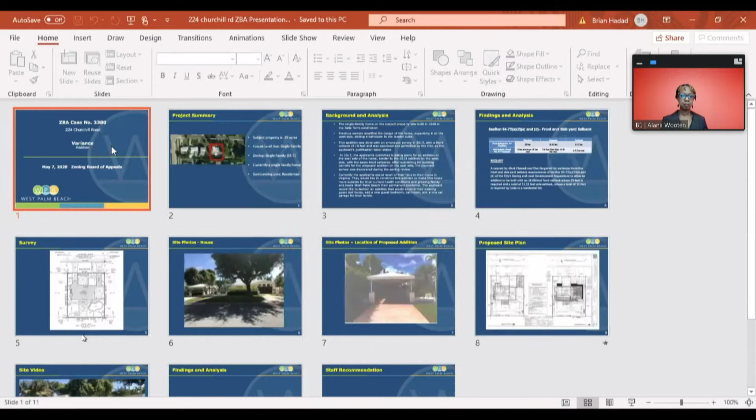This is Malaika, chairperson. Does the applicant go first before the staff? That's correct, correct. Alana, would you mind if the applicant goes first? Sure, yes, I'm sorry, I'll stop the share. Yes.

Sir, you'll need to unmute yourself before. Or here, let's see if I can do it. Okay, can you, there we go. I see it now, thank you. Okay, now we got you. I'd just like to understand what the expectations are in terms of presenting. They would like to get an overview of what we are asking for in short. I'm asking a question, please sir. She said please, go ahead. Please sir. Okay. Go ahead.

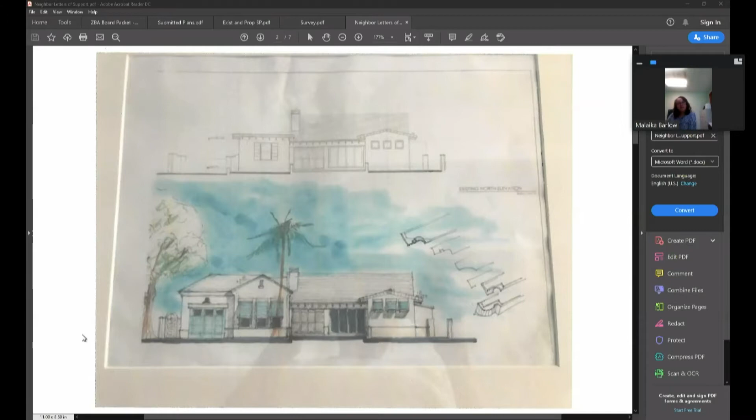So with that said, we don't intend to make any, forgive the expression, ugly changes that would either hurt our own home or make it unpleasant for our neighbors and our community. We pride ourselves on being very conforming to all the rules and regulations because we're part of a society. So that is the change. No other changes are going to happen to the house in terms of landscaping, zero change. There may be a couple of plants to be changed on the front once the garage has been put there. And of course, we will do whatever we need to do to beautify the front of the house, including the facade. The color will remain the same, clean white with gray bluish window treatment.

Alana, do you want me to go on and cover the background of the previous owner, or is this sufficient now? No, we appreciate the offer. Not necessary. Okay.

All in all, really, what we are asking your kindness for is allowing us to have the space so we can have our family join us and we can leave Washington, D.C.

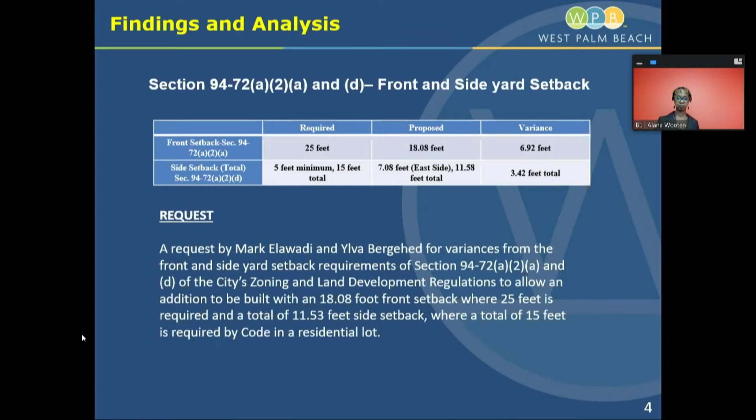So this is a survey of the property showing accurately all of the setbacks, and I believe this was in your package as well.

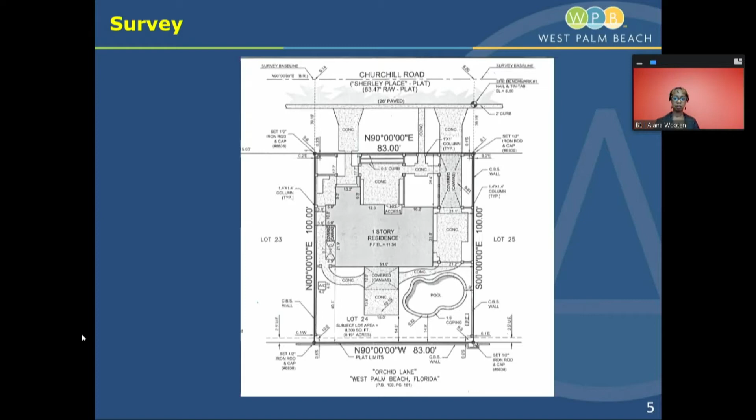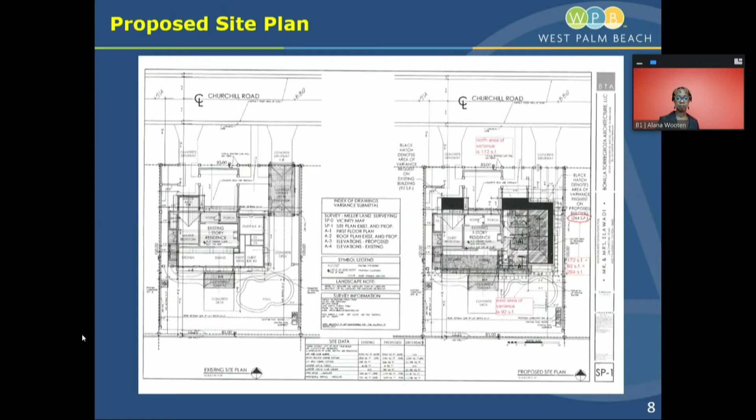As the applicant stated, the design of the addition will blend in with the overall design of the home. The residential development area here has a recessed property line that extends at least 24 feet back from the road, so if you're driving along Churchill Road, it's unnoticeable that the buildings encroach into the front yard setback. Further, on the east side, the applicants could have gone as close as 5 feet to the east property line by code, and they're only asking for 7, so there's no additional impact on the neighbors on the east side.

It's staff's professional opinion that the requested variance does satisfy all of the variance standards found within section 9438D6 of the city zoning and land development regulations.

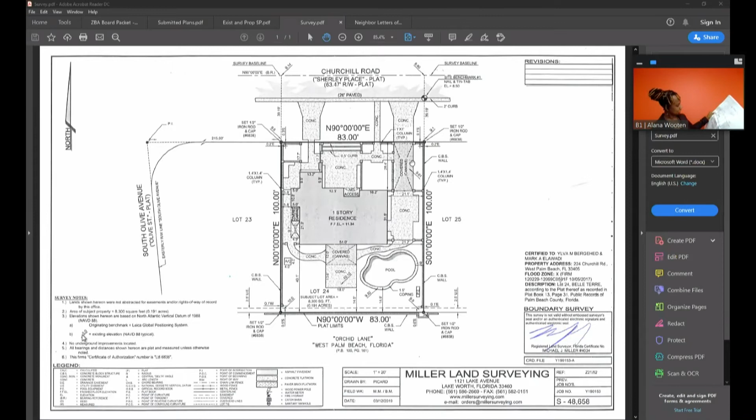Ms. Wooten, I think the question is it's not really shown, that covered canvas area. It looks like the front columns for that are right on the property line. If I was reading that correctly, and I had a hard time reading that off the survey, but that's what it looked like to me. Yeah, it looks like they have foot walls, like a small wall or fence.

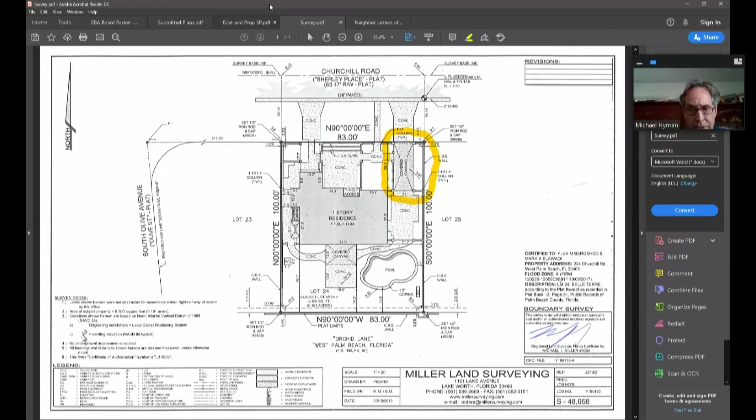Okay, well, I guess it's deceptive because I thought the property line is located where it is, and the carport, for all intents and purposes on the front of the property, is set on the property line. It's my understanding that's going to be removed. Yes, and the building will not encroach as much on the front setback. You're telling me it's going to be 18 feet from that line going to the south, is that correct? Yes, it's going to match the addition on the west side. Okay.

Yeah, John, that helps to do that—and I don't have my book downloaded. Thank you very much. So in black is the area that's going to be added. Yes, I see that. Okay, all right.

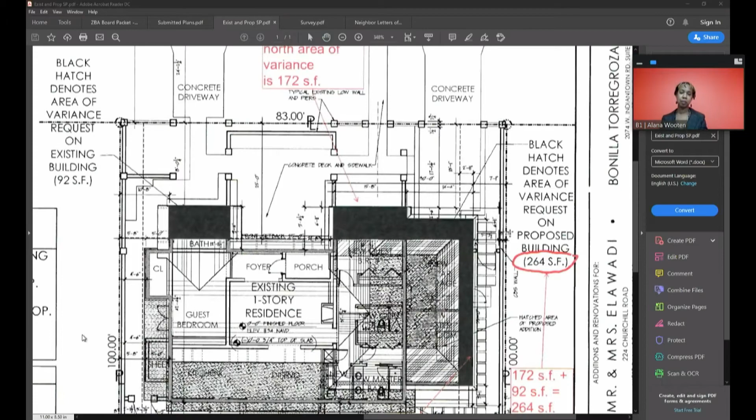The only other question I have for staff is, and this gets to be a sticky wicket, what is the justification relative to self-imposed hardship? What is the hardship here? Well, the hardship is a number of things. It's a combination of the applicant coming in—through all intents and purposes they thought the addition on the west side was permitted and okay, so they were coming in to match that on the other side. They have some existing healthcare conditions, and they're trying to outfit their home for their expanding family and relocating in West Palm Beach. So it's a combination of those things that create a hardship.

Okay. To the applicant, please understand that we have to look at certain things, and there's criteria we have to use in order to grant the variance. So I'm sort of stuck on that. I'm not the only person voting, and it's not necessarily one issue that will deny this. So I just needed to ask these questions.

Okay, thank you, Board Member Hyman. We'll now go to Board Member Kammerer if you have any questions. No, I don't. Okay, we'll go to Board Member Barlow. Any questions for staff? No questions. Thank you. Okay, we'll go to First Alternate Wood. No questions. Okay, and Second Alternate Fields. No questions. Okay, I don't believe I have any questions for staff.

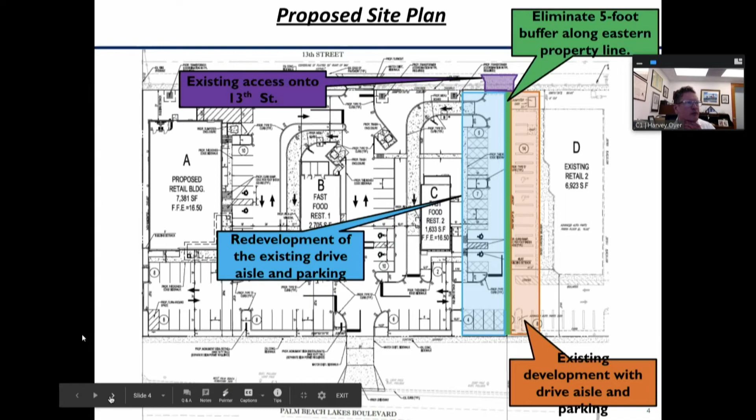Not a problem, but for the fact that the code requires a 5-foot landscape buffer between different property owners, and here we have different property owners. We would need to put 5 feet of landscaping right down the middle of the drive aisle, bisecting the shared parking if we were to abide by the code. And that's where we're seeking the variance.

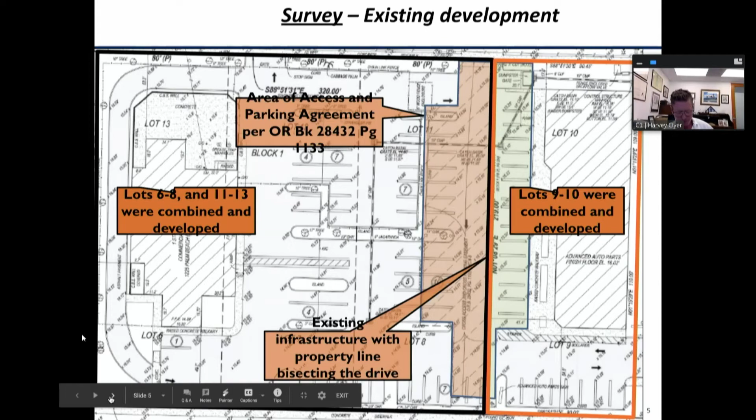Next slide, please, and I can come back to any of these if you have questions. The benefits of our request: we retain the existing uninterrupted drive aisle that serves both the subject site and the adjacent property to the east, the Advance Auto Parts, making the site function more efficiently. Otherwise, we'd both have to put in our own drive aisles, both put in 5 feet of landscape buffer, and both try to meet a parking requirement that neither property can meet.

So the value to the public of the 5 feet of landscaping we've retained is addressed by moving the equivalent amount of landscaping to other locations on our property as mitigation. Eight shade trees and a hedge were required, and we have relocated those on the property. They are in addition to all of our other landscape requirements, not in lieu of them, so the same amount of green space is being replaced.

Additionally, if you look at the third bullet point in the summary, we have agreed to replace royal palms on the frontage on Palm Beach Lakes Boulevard, which is not our responsibility, but there are several dead ones. Palm Beach Lakes Boulevard is lined by generally beautiful royal palms that really distinguish the road and make it look better. Several have died, and we've agreed to pay to replace those and maintain them going forward. That's in a county road right of way.

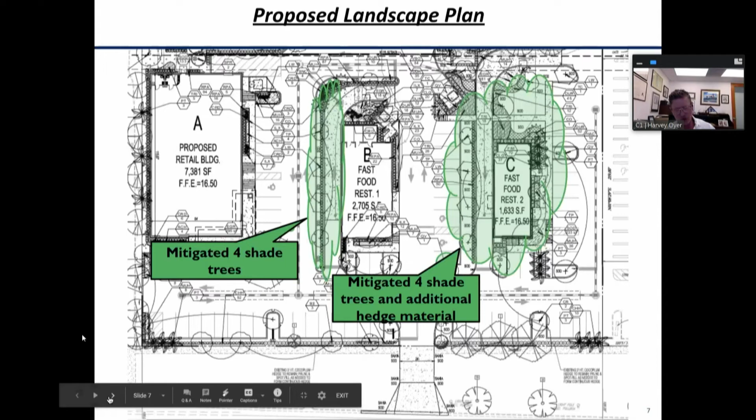The final two slides indicate that we meet all of the requirements for the granting of a variance, outlined in section 94-38D6. I'm happy to go through these individually, but we believe we meet them and staff agrees with us. Those are the standards by which you review the granting of a variance. The final slide simply reiterates our request, which is we respectfully request approval of the elimination of the 5-foot landscape requirement in this variance.

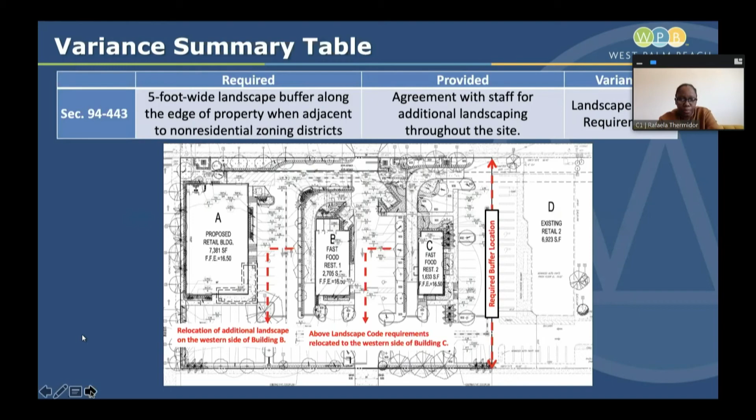This is what they're proposing. Staff's general recommendation is approval from the board based on the conditions that we have set forth.

The 3 conditions that we proposed, the applicant has complied to and agreed with, which is reflected in the letter of support, which I think is in your packet. If not, I can always show it to you, from Advanced Auto Parts. This includes the relocation of the 8 shade trees and additional landscaping throughout the site, and the replacement and maintenance of the palm trees along Palm Beach Lakes Boulevard, which were basically mitigations to accommodate and show that they are willing to work with us and better the site.

I think that's it, yeah. Are there any questions for staff? None? I have one question.

The 4 palm trees on Palm Beach Lakes Boulevard, they're the ones that are dead now that are going to be replanted by the applicant? Yes.